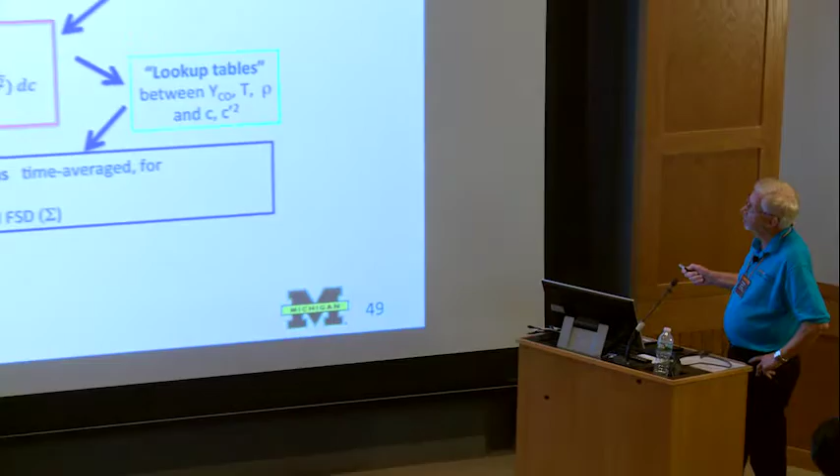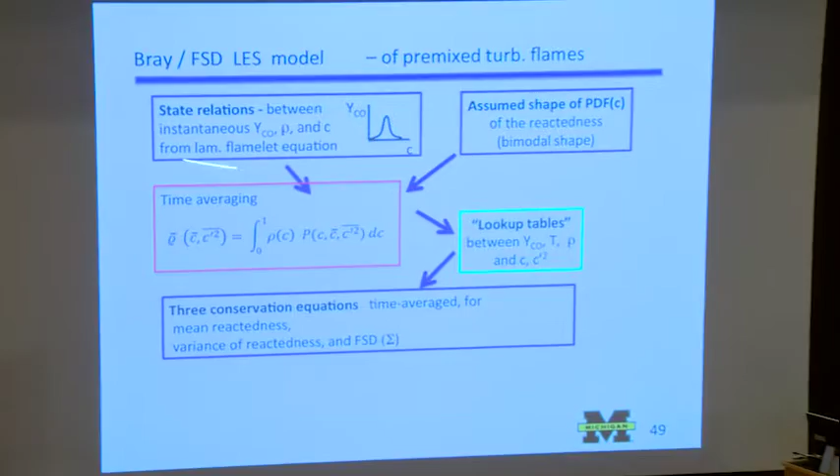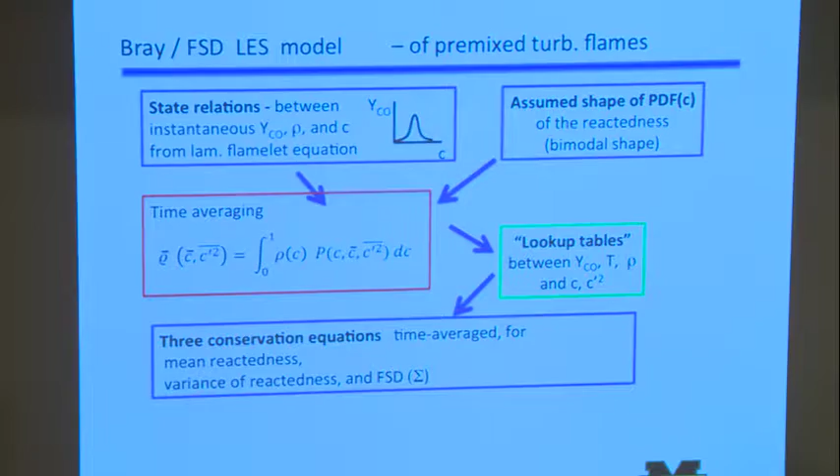Okay, with the Bray flame surface density model, it's pretty much the same thing as we've been talking about before. You need a shape of the PDF, which is mostly bimodal. You need state relations, which you assume from laminar flamelet equations, which can be either unstrained laminar flamelets, in other words, a very low strain rate flamelet on CHEMKIN, or you can run a strained flamelet on CHEMKIN and get these state relations, which go in here and then are used for time averaging.

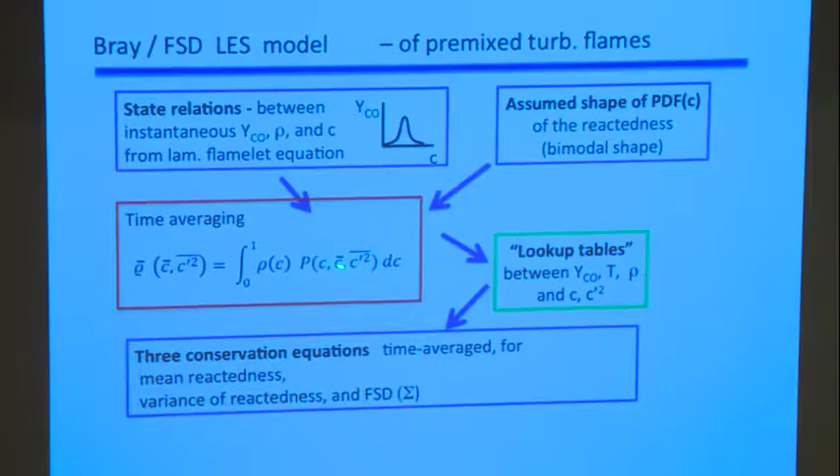And then you generate tables in which the mean properties are functions of these two other variables, C bar and the variance. So the lookup tables, I didn't put the proper symbols on top here, but the lookup tables are between the mean density and the mean reactedness and variance. Okay, so you've done all this integration and you get these lookup tables, and then you can quickly solve the equations.

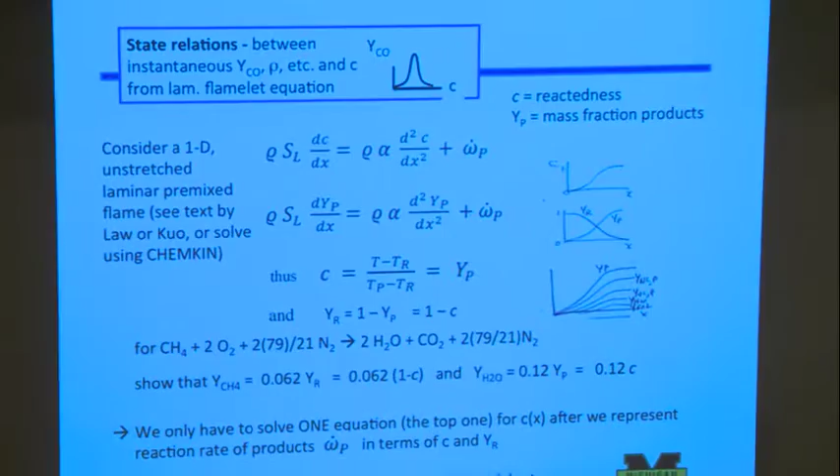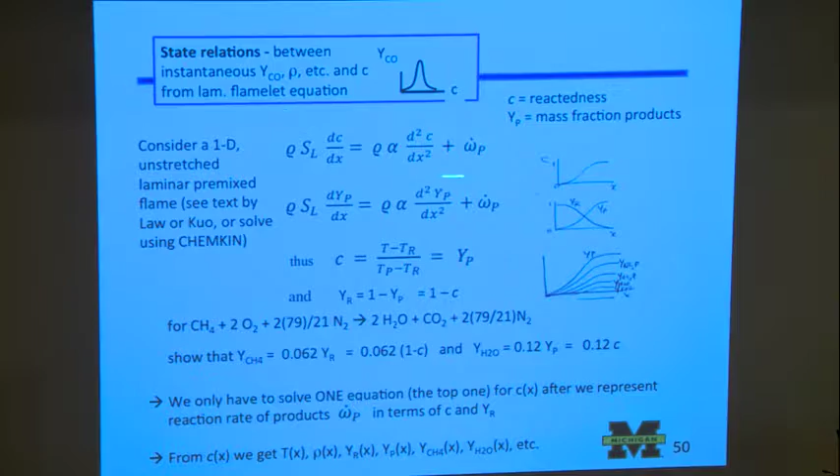To get into this flame surface density approach, I'll once again put this equation up. This is just for a laminar flame. It's in the coordinate system of the flame, and so the gas is coming at it at a speed S sub L, the laminar burning velocity. The temperature is going up in the x direction because of diffusion, diffusion of heat back from the products into the reactants, and then a reaction rate term.

And the same is true for the products, except they're going up and the reactants are going down. The temperature is going up. So let's see, yeah, the products are going in the same direction as the temperature, and that is up. And so you get a similar relation.

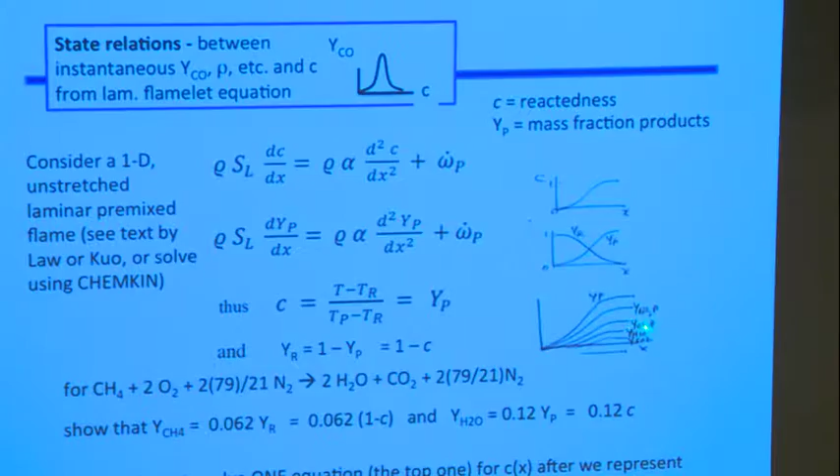Now the state relations will tell you that the species mass fractions are related to each other. So if the products are going up, that means that a certain fraction of the products are nitrogen, oxygen if it's lean, water, and CO2. And so they all go up proportionately, and you can get all that from this fast chemistry relation.

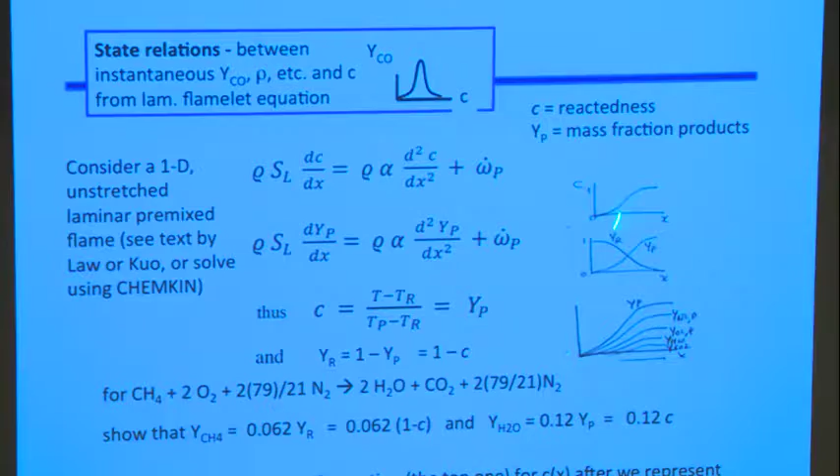Okay. So again, the idea is we only solve one differential equation, and then for the laminar flamelet, we can get C, and then we can use the state relations to determine the other properties. Okay, and so this is just something you get out of CHEMKIN.

My students working with me have plotted this. This is the temperature going up from reactants to products, and we non-dimensionalize it and call it reactedness. And then the OH curve is something that goes up and then reaches a steady value. The OH is only formed once the reactions start.

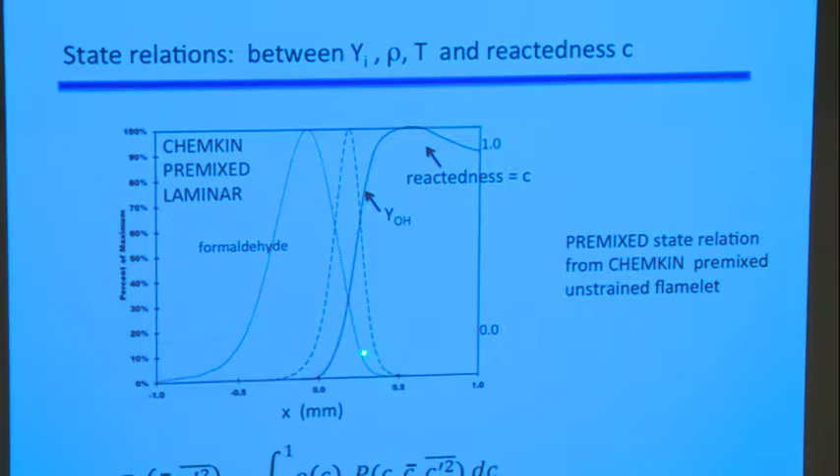Formaldehyde is this curve, and it's formed in this region, but it diffuses upstream because all species diffuse in both directions if they're intermediate species. And so this formaldehyde will diffuse upstream, and you can get these lookup tables.

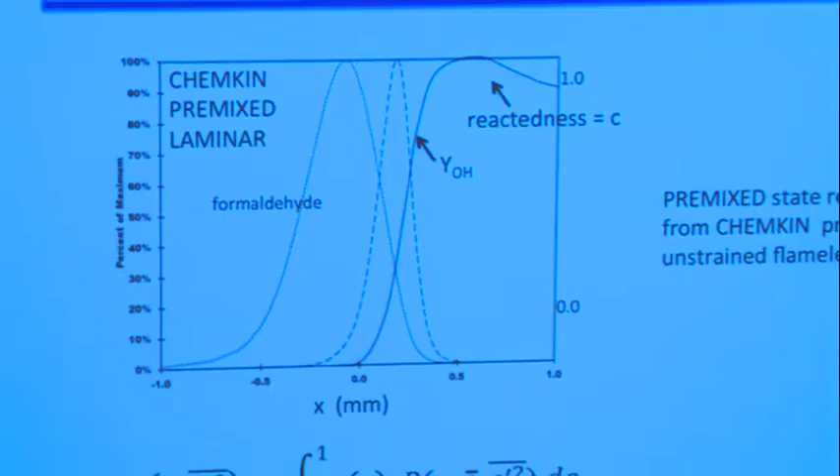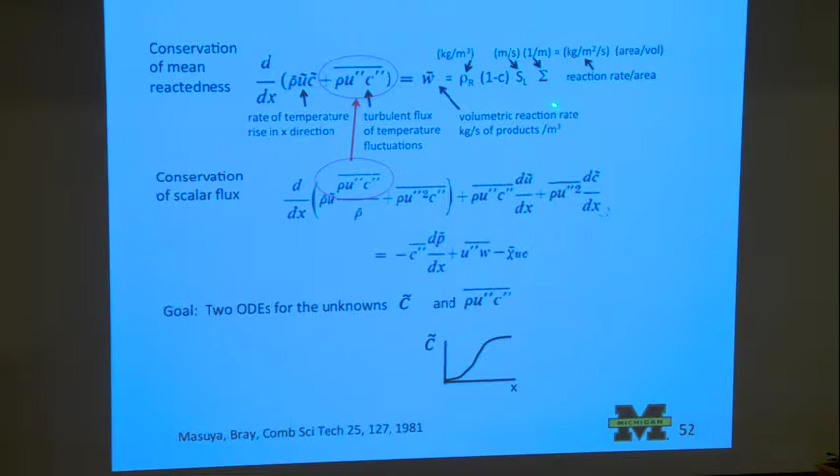Now, when Bray did this analysis in the beginning, he wrote something like this. He said that there's a rate at which the temperature goes up, but then there's also turbulent fluxes of temperature, which are given by these correlations. And you can get them, again, by looking at the state relations and the PDFs and compute these values. So that was part of his analysis.

But then the reaction, this is all now for the turbulent case where he's done the Favre averaging. The reaction rate here is the big problem. And this is kilograms per second of products produced per cubic meter. So it's a point quantity. At each point in space, this quantity is defined, and it's per cubic meter.

And he argued that it's related to the flame surface density if you assume that there are premixed flamelets oscillating around. And so, again, as I said earlier, there are two issues here. Making sure that the reaction rate is right, and making sure the diffusion of species is right. And you could just relate this to a turbulent diffusivity, or you could try to be more exact, and that's what he did. Okay, so he actually tried to write an equation now for essentially the diffusion term, okay?

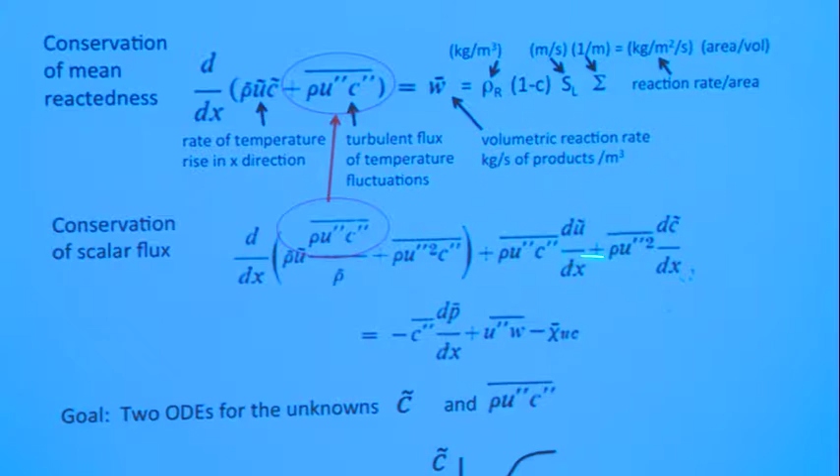And so, again, he says that it's a quantity that can be convected and can diffuse itself, and then it can be produced and be destroyed. It gets pretty complicated when you do that, because you can do that with any term at any level, but this is a higher moment which he models with this equation.

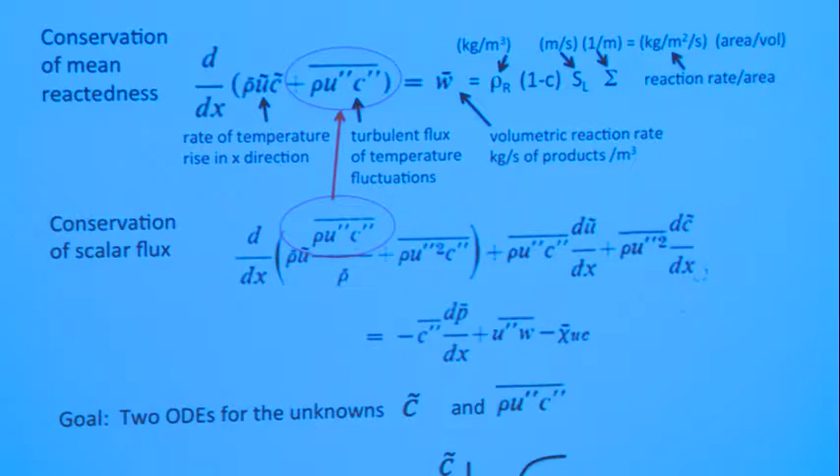And actually, this paper here by Masuya, he's in Japan. He's a very active researcher today. He worked with Ken Bray, who's retired, and this is back in 1981. They did a really nice analysis of this premixed turbulent flame.

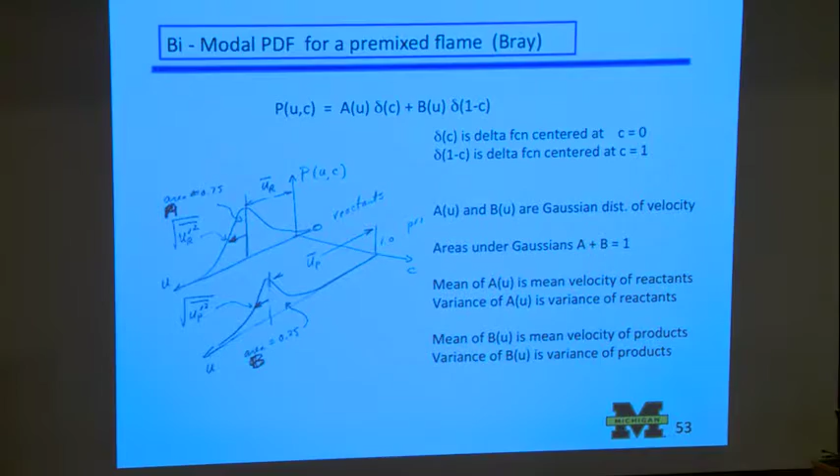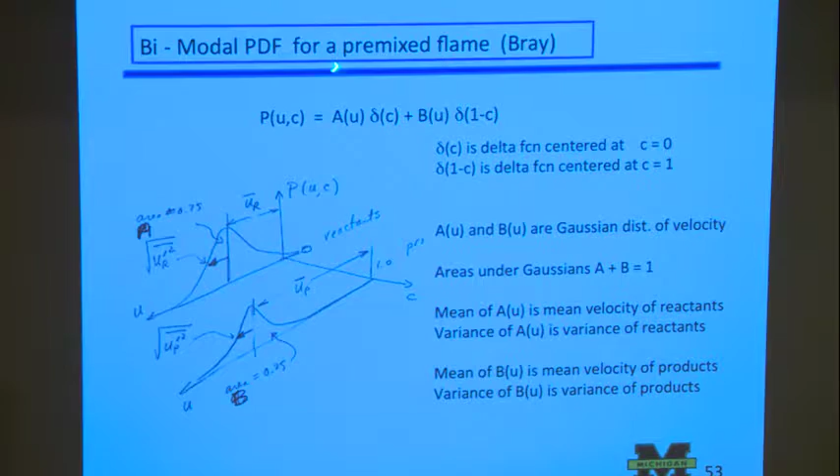Now, I sketched this. If you have a PDF, it's a bimodal PDF, but it's a PDF that depends on both the velocity and the reactedness. So if we look at C, the non-dimensional temperature this way, we say that we have C equals 0, and we have a spike at C equals 1. These would be reactants, and these would be products. But then we have velocities in each of these regions.

So you imagine all the gases coming towards the flame have a certain velocity field and velocity fluctuations. And so this curve here is what Bray would use to represent the velocity field in the reactants. And so it's a Gaussian. It has a mean velocity, and it has a variance, which is the square of the RMS velocity fluctuations in the reactants.

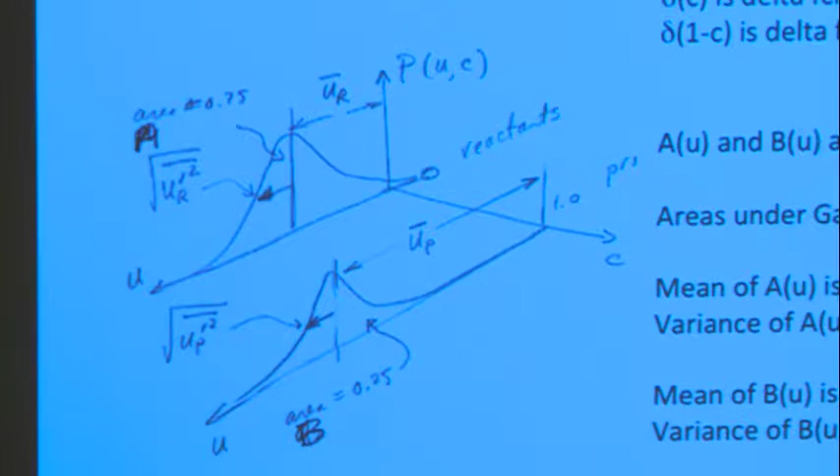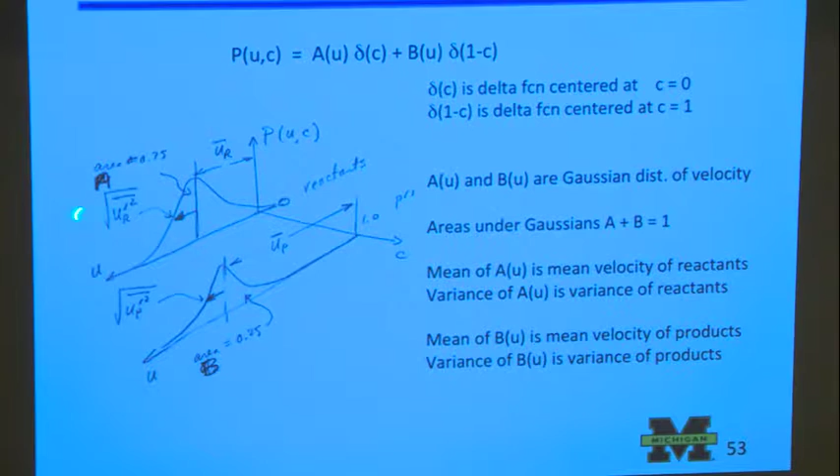And so this U prime, actually this square root here, would be considered to be the turbulence in the reactants, okay? It's conditioned in the sense that it's only when you have reactants that you compute or measure this velocity fluctuation. But then when you happen to be in a region where there's products, you will also have a Gaussian distribution of the velocity field.

But here now the mean velocity will be a lot larger than over here, because the gases have accelerated. The density is much lower here. And now we have a mean and a variance, and the square root of this variance would be the RMS velocity fluctuations in the products. And so this is the turbulence in the products.

Now, if you say, what is the turbulence level of everything at a point? So if you just sat at a point and measured the turbulence, the velocity fluctuations, you'd get a number that is a combination of the turbulence level in the products and the turbulence level in the reactants. And it would also depend on the two mean values, because suppose you're sitting there making a measurement and this flame is moving back and forth.

Sometimes you get the mean velocity of the reactants, and sometimes you get the mean velocity of the products. That will contribute to the velocity fluctuations at a point. So when you say the turbulence level in a premixed flame, you have to be very careful what you define to be turbulence level.

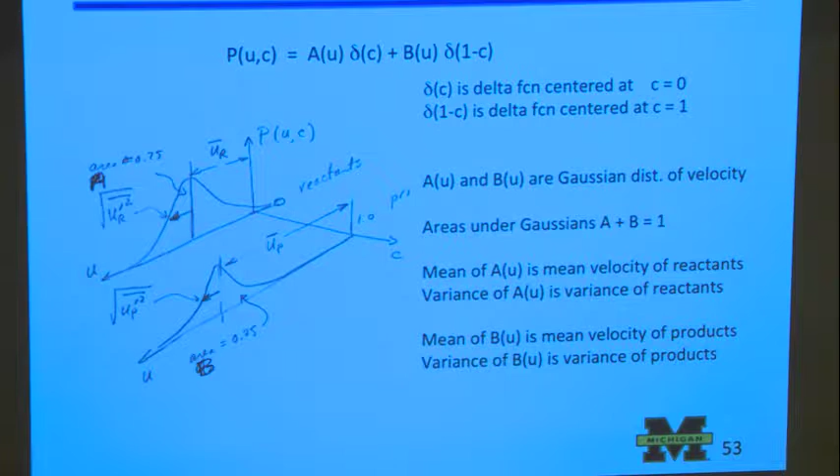And once again, you would take the laminar flamelet solution and put it through this type of PDF. This is P of C. And this is just an example of some of the math involved. It's fairly easy to do the math when you have a bimodal distribution. I thought I'd put this here just for fun, but I'm not sure it's any fun. Anyway, Bray was able to simplify a lot of the math.

Here is the velocity fluctuations. These are the reactedness fluctuations, the variance. And it's defined as C minus C bar squared bar, okay? And then you multiply that by the PDF, and you put C minus C bar squared, P. But now the PDF is just A times the delta function centered at 0, and B. And A and B have to add up to be 1, and A and B are related to the mean reactedness C bar, which I don't have here.

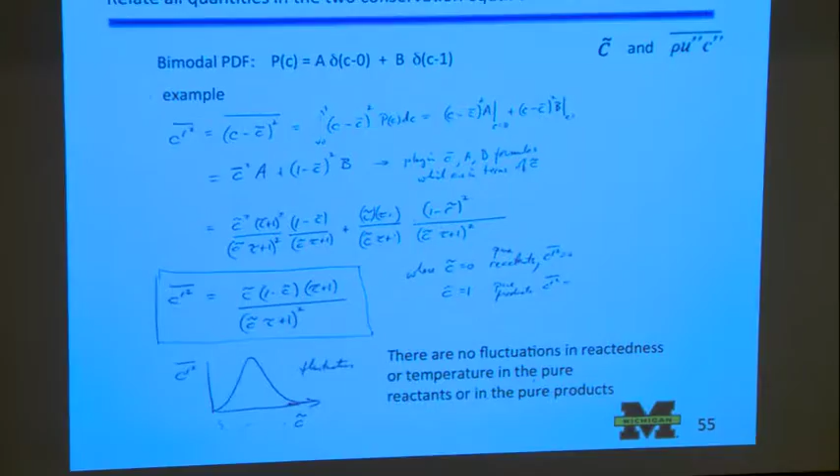Anyway, what Bray did was greatly simplify the whole analysis by using this bimodal PDF, and therefore he ended up with ordinary differential equations because he considered a one-dimensional turbulent flame where on the average the flame is flat, but it's got all these wrinkles within it, and it's kind of nice to be just solving ODEs because then you can put it on MATLAB and push a button and you're done.

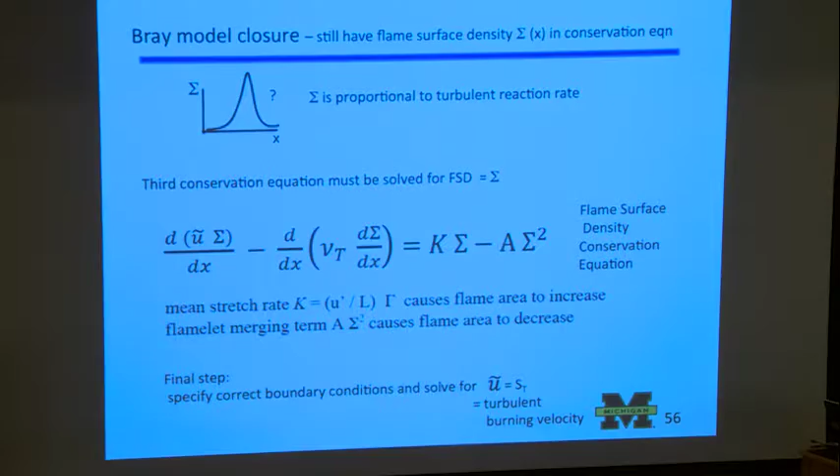But you still have this reaction rate problem. And so he started out with some unrealistic assumptions, and when he started working with the French, they came up with a much better approach, and that is to determine the flame surface density, which is proportional to the reaction rate, by writing this equation, okay?

Now, again, anything can be written in terms of a convection, diffusion, source, and sink. And flame surface density is a Gaussian function that sort of tells you where the flame brush is in space. And if you attach the coordinate system to the flame, then you don't have any unsteady term.

If you want to do another analysis and attach your coordinate system to the engine, let's say not a diesel, but a spark ignition engine where the flame is moving through, then you'd have to put the unsteady term, and it would simply allow this Gaussian to move through space at the turbulent burning velocity.

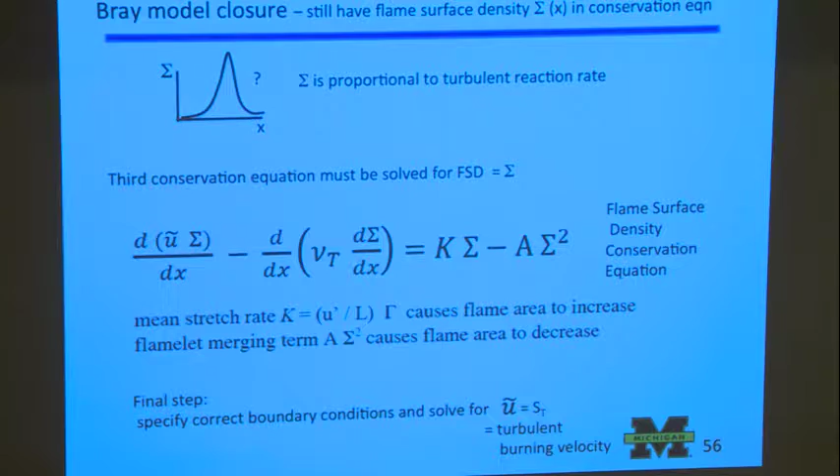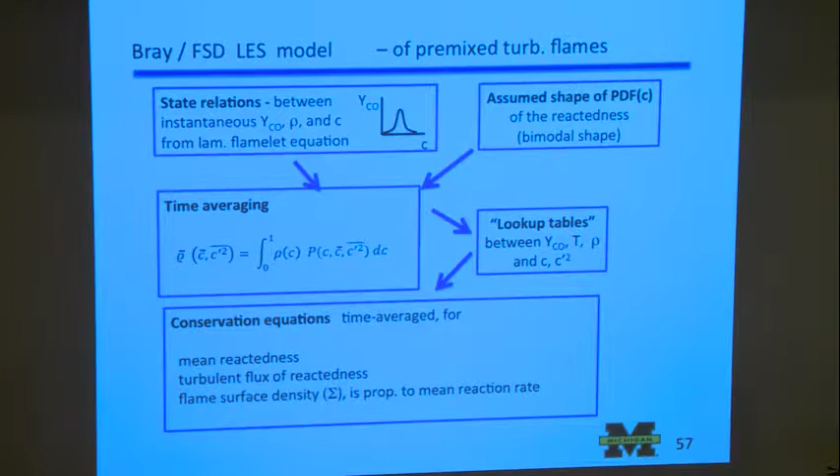But in this case, I've written this equation for coordinates that are attached to the flame, so it's just sitting there, and the gases are coming at it, and this U tilde is essentially the turbulent burning velocity, and we have a diffusion term, a source term, and a sink term. Okay. Now, that will tell us what sigma is as a function of space, and that will allow us to solve these equations.

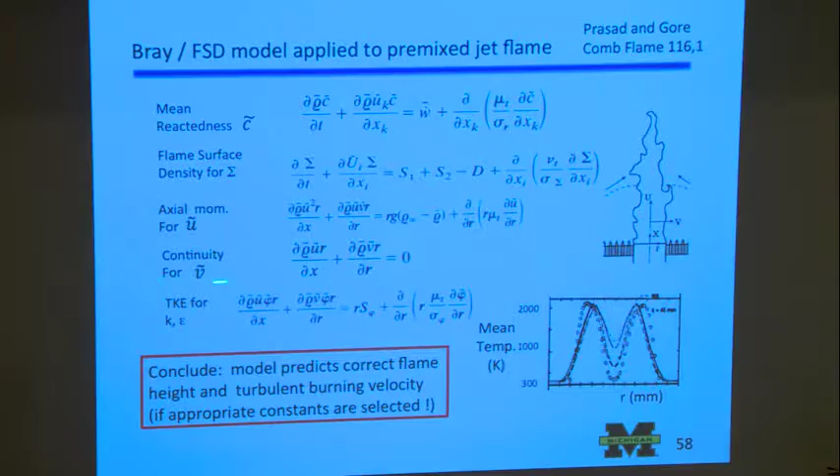They have an axial momentum equation, a continuity equation. They need a turbulent kinetic energy equation, which they have in their Combustion and Flame paper. And let's see, did I put any more? No, I didn't put any more equations. There is an epsilon equation that looks sort of like this, and I didn't write down, there is just a simple linear relationship between the reaction rate and sigma.

So if you look at all these equations, they're closed. You get C here, you get sigma here, you get U here, the continuity gives you the radial velocity, and the K epsilon equations give K and epsilon. Now, you do have to put in these three terms.

These are the rate at which flame surface is created and destroyed. And this term here is a stretch rate term, and this is a merging or dissipation rate term. It's proportional to sigma squared, because as the flame surface density gets large, things get very compact, and they argued that the flame merges and disappears.

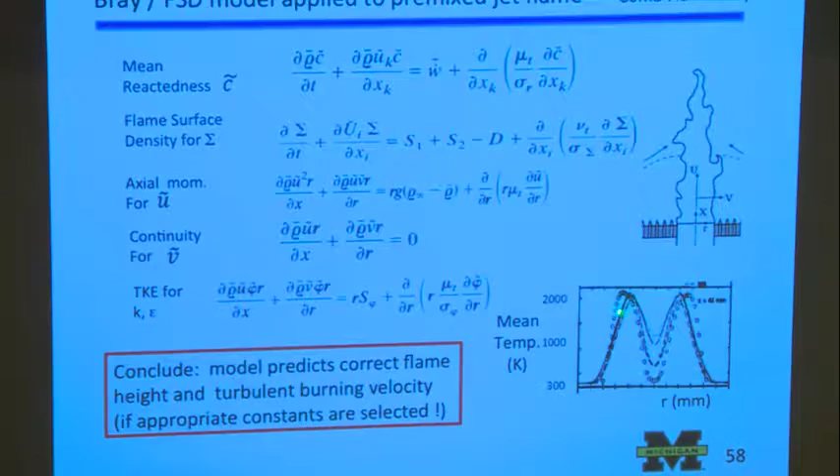So they explain how they did all this, and they end up getting a mean temperature as you go across in here, and as you expect, the peak values that are on either side. And the main thing, though, is that if you do this at different heights, you can sort of get an idea when these two come together. There's another one up here where it's sort of like this, and that's up here at the tip, where you call it the flame tip.

And so they have another graph of that, and it predicts the height of this fairly reasonably with the modeling assumptions they made, and so therefore they're essentially getting the right overall burning velocity. Now, I would call this an engineering model. It's first a RANS model, and they have a lot of adjustments that they can do to make it work right, but it gives you a lot of understanding of how to simulate turbulent flames.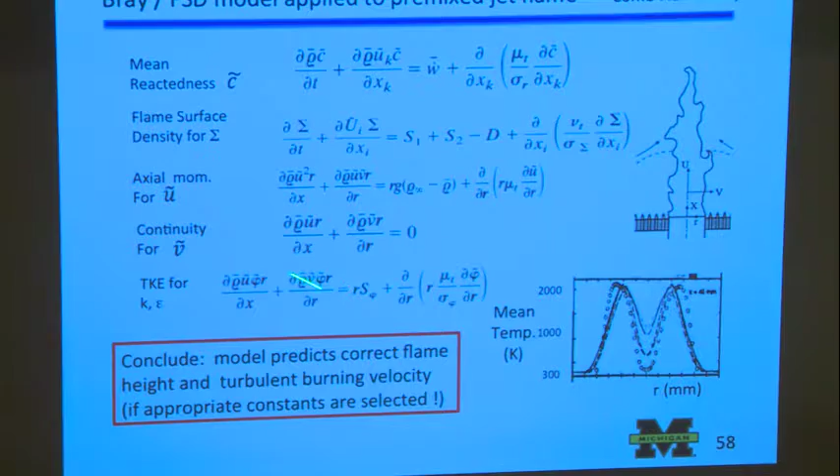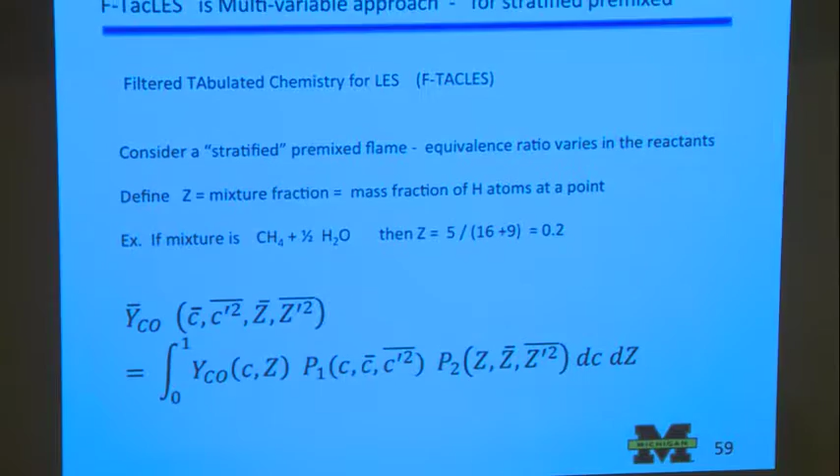But in these equations here, there's no chemistry. Okay, they didn't make any attempt to get any chemistry out of this. They get temperatures, they solve for densities, and they get velocities, but they didn't make any attempt to do chemistry. And so the filtered tabulated chemistry LES is the modern approach. This is very recent.

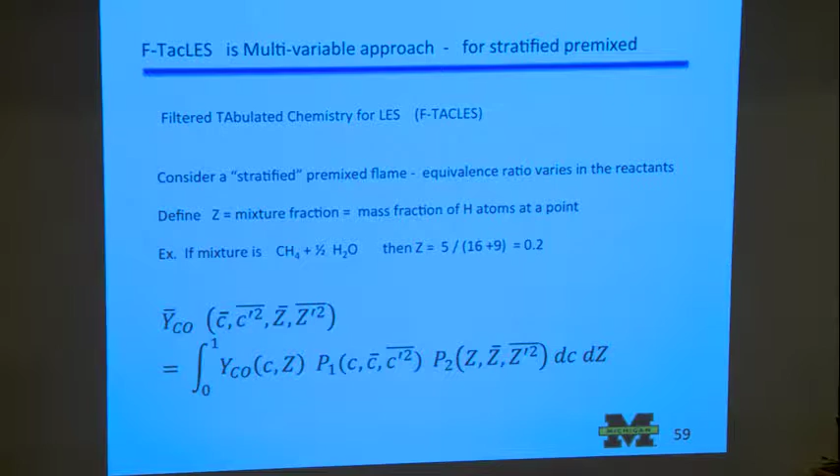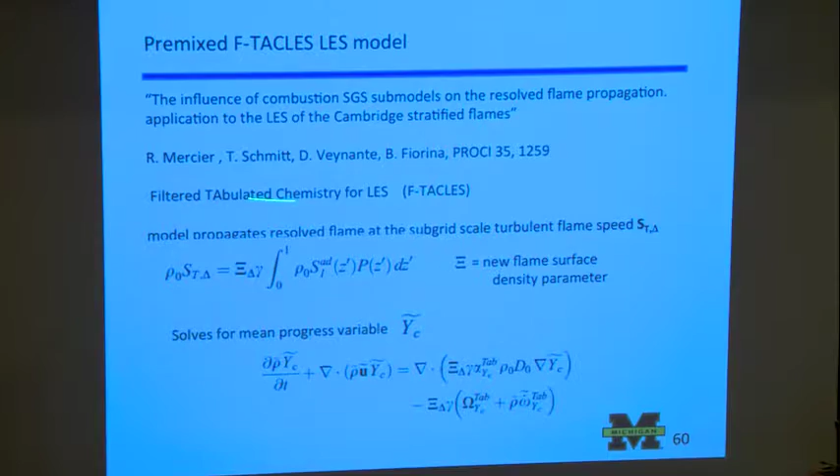And the paper that I think is the best is one by, again, Veynante, and it's fairly recent, and they apply this to the Cambridge stratified flame burner, that burner I showed with concentric premixed streams, all different fuel-air ratio. And they're using the following approach.

They say that basically the reaction rate, which they call the subgrid turbulent burning velocity, but it's the reaction rate, is a product of the flame surface density, and they call it this for some reason. Everybody uses different symbols, but this would be something like a flame surface density, and then this is this integral of the reaction properties for the laminar flame multiplied by the PDF.

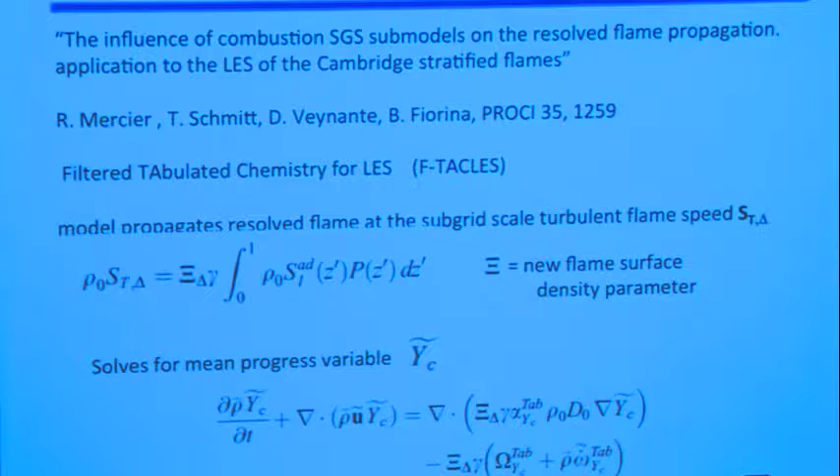It's a little confusing because they use totally different symbols than Bray did. I guess it's the French versus the British or something. You know, they all have to use different symbols. But it's basically the same idea. You have to get the new flame surface density from a flame surface density equation, and you need to then use flamelet ideas to stick it into the integral. But here they can use complex chemistry when they do their laminar flame lookup tables in state relations.

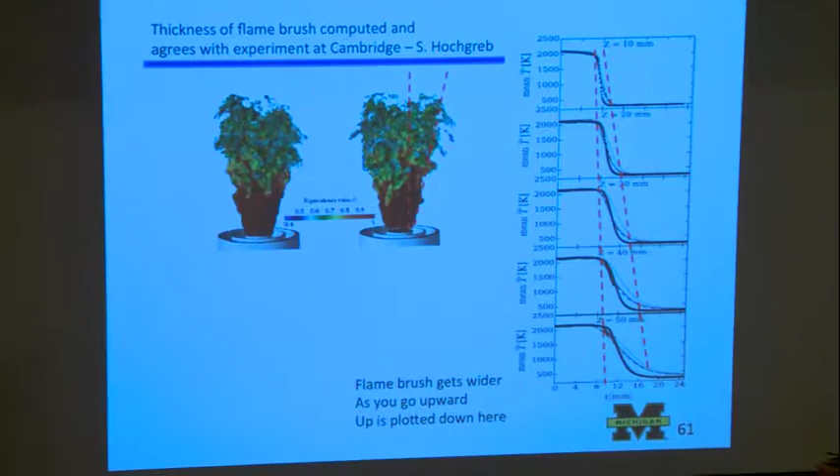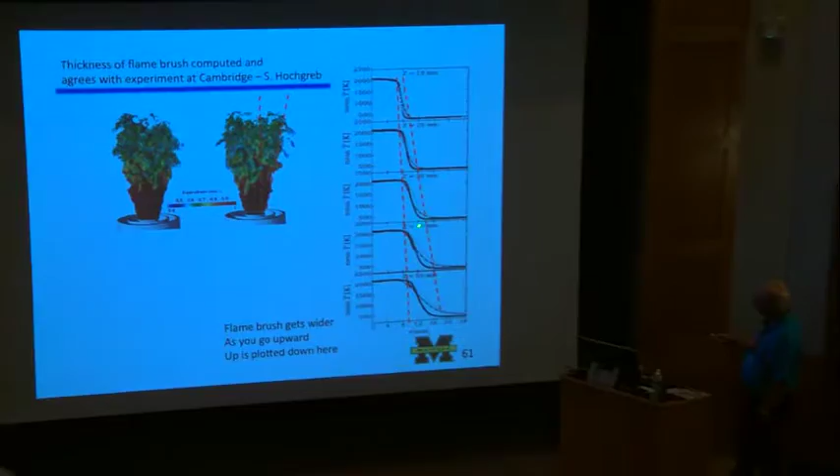So again, this is their LES simulation. It looks really beautiful, and as you go up, let's see, this is at the base. As you go up, this brush region is getting broader. This is the temperature, and they did in this paper compare to the experiments done at Sandia, again by Rob Barlow, and everything looked pretty reasonable. Okay.